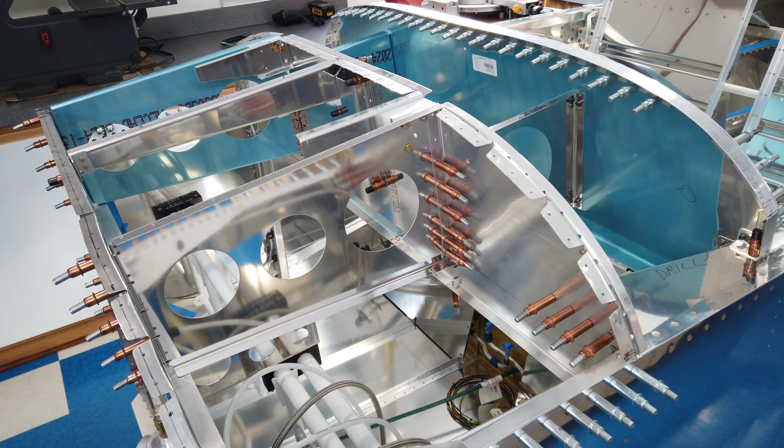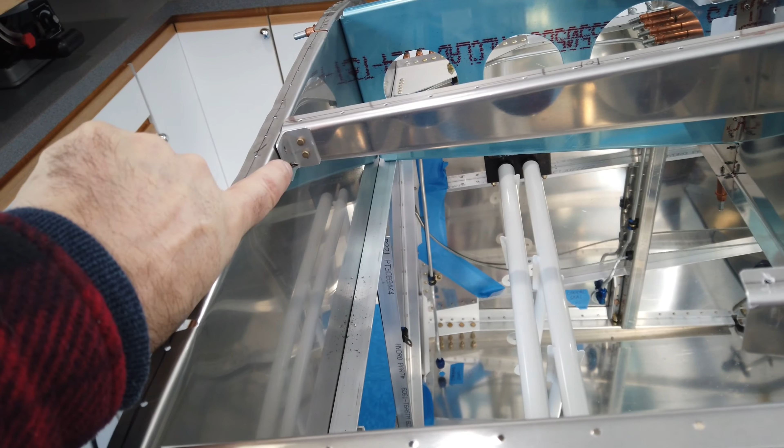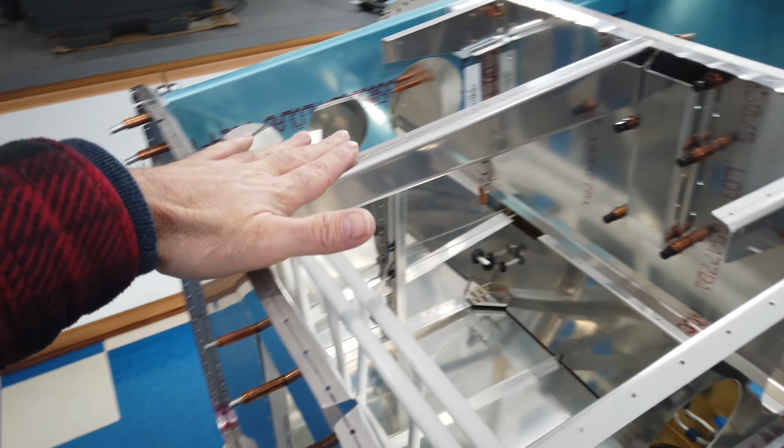So like I had said before, I had the skin on here and I match drilled everything that I needed to match drill with the skin on. Since then, I've come back and I've made this angle bracket here, and I've gone ahead and match drilled it to the firewall, and I've got it held down with a single cleco. So now this piece is done and secure. I still need to figure out where to put the holes on this piece for the nut plates.

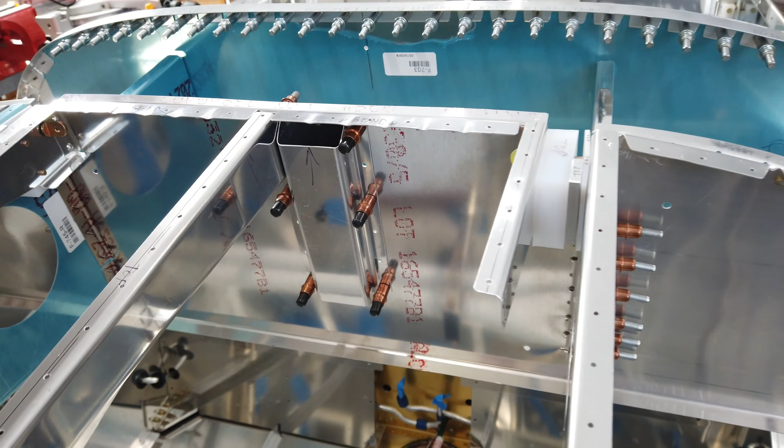These nut plates attach to this piece to hold the block that holds the pivot mechanism for the Canopy Jettison linkage. So the first thing that I've decided to do is to find the linkage and start making it. This is drawing 47. You can see the linkage here, and I'm making these two pieces here, these two metal tubes.

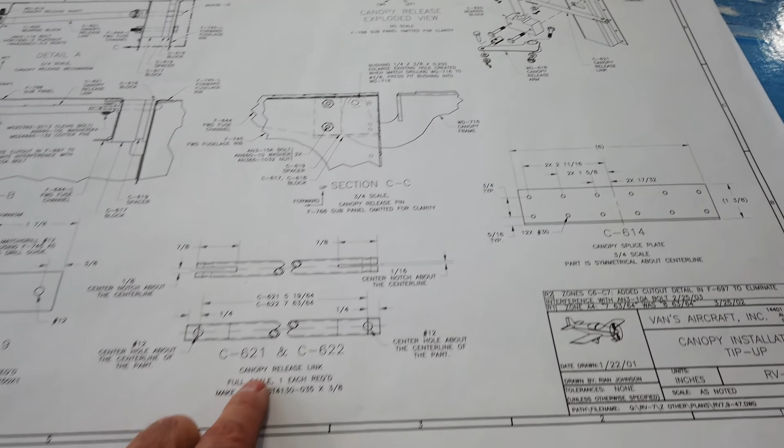They're 4130 steel. Here are the two detail drawings for those two tubes. You'll note that they're different lengths — this one's quite a bit longer than this one. These are the details for those, and I've already started on them.

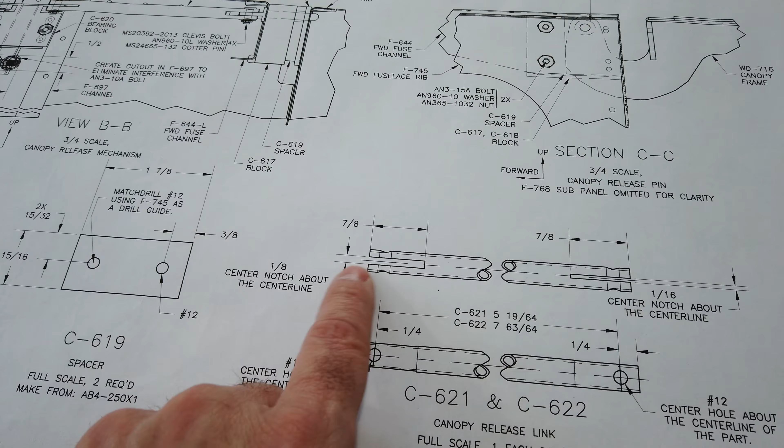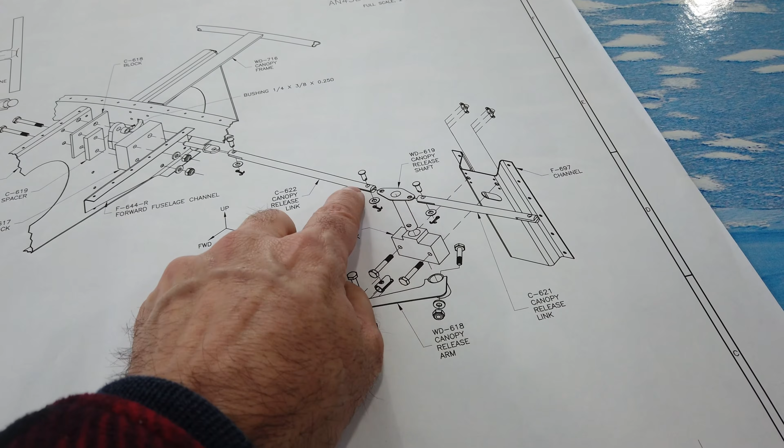Another thing to note, one end of each tube gets an 1/8 inch thick slit, and the other end of each tube gets a 1/16 of an inch slit, roughly. The smaller slit, the 1/16 inch slit on each end, is for this metal piece here, and the wider 1/8 inch slit on each tube is to fit this eye bolt.

So I've already started on that, and basically I'm starting on the 16th slit. All I had done was use— not a bandsaw, I couldn't use my bandsaw. I didn't trust it, and I don't have the right kind of blade for cutting steel, but I used just a hacksaw and cut it down, and then used a very small jeweler's file to open it up a little bit wider and clean off the rough edges.

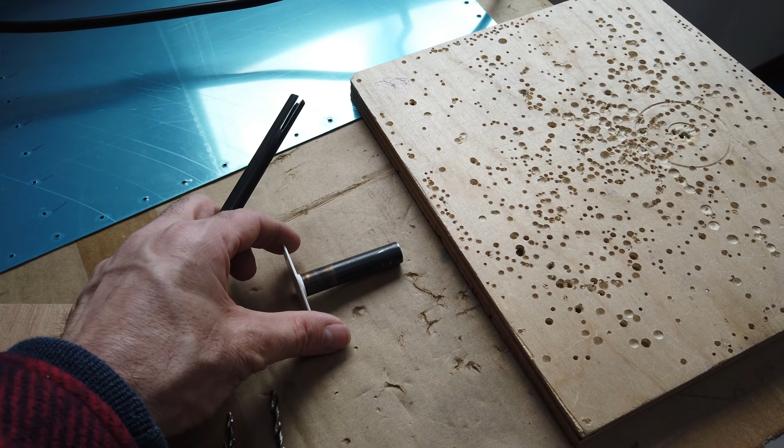Here's the metal piece, and the slit's got to be wide enough for this metal piece to fit into it.

Now that I've got that done, I'm getting ready to drill the hole through the end, and I've got my drill bits out. I've got the smallest one on the drill at the moment, but what I start with is this — this is a center drill. It's quite small, I don't know what number this is, but I just use this to start my pilot hole.

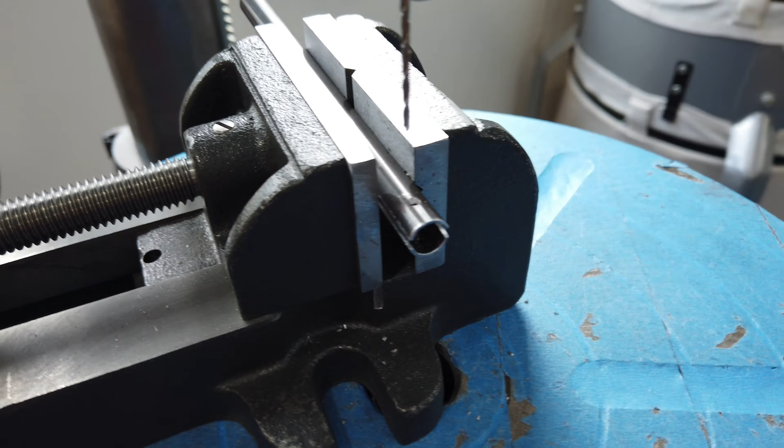I've already done that on the drill press. I've got my piece on the drill press. Of course you want the hole to be perpendicular to the slit. I've got that set up, and I've already drilled with the— wow, I just can't think today, it's not a countersink, I just said what it was, the center drill. So you can see where I started with the center drill here.

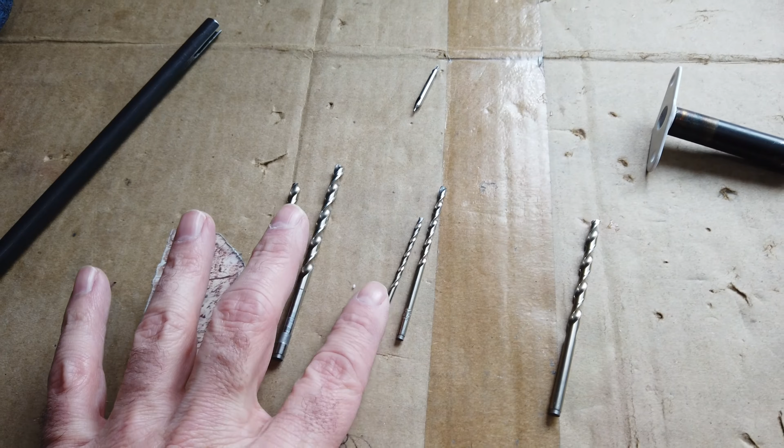I've got my smallest drill bit in now, and I'm going to go ahead and drill through the hole and through the other side, and then I'll step up gradually — larger and larger till I get to my final size, which is a number 12. So that's the plan.

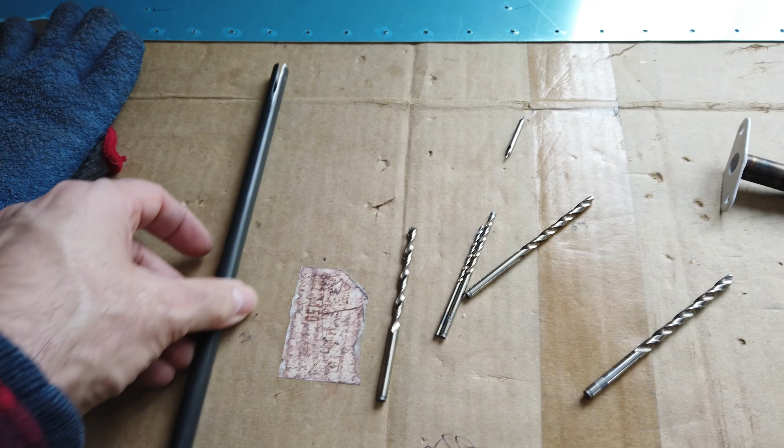To do the larger slit on the opposite end of each tube, I'm going to use my milling machine. I didn't have an end mill small enough to do the 1/16 inch slit, but I do have an 1/8 inch, so I can cut the slit on the other end. That's the plan. Let me get these holes drilled, and then we'll see what gives.

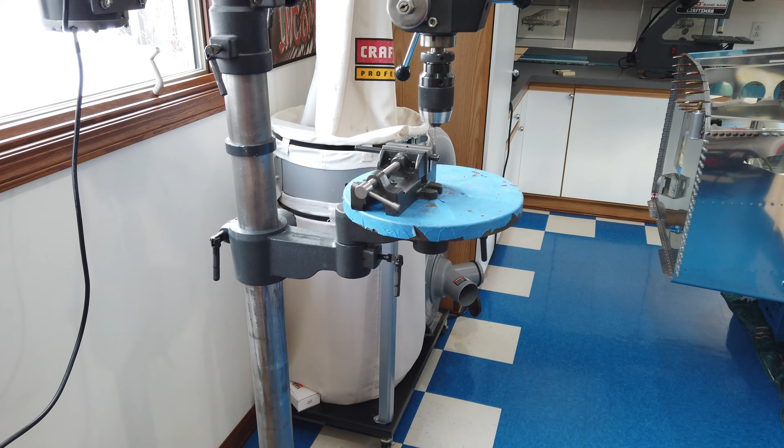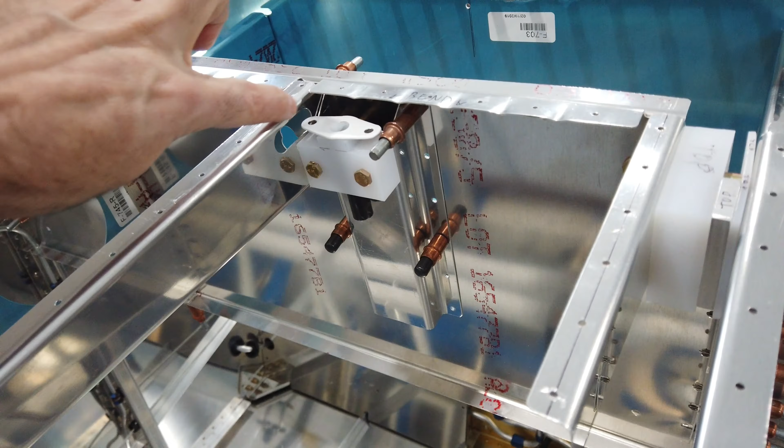Okay, so back at the airplane, what I have done — you can see where I have put the slit in this piece for the rods that connect from this pivot point out to the actual pins that get slid when this rotates. So one of the arms has to pass through this piece, and you have to mill a slot so there's enough room so when this piece turns, your shaft can still go from this point to the pin and not interfere with this piece.

So I've got my slit cut. You can see I've got my block in place temporarily — this is just slid on with a couple of bolts.

So what I'm doing now is a couple of things. One, I'm verifying the length from this point to this point for one rod, and then the length from this point to this point for the other rod. I'll adjust the length of those rods if needed, and then I'll finish slitting them and putting the holes through them.

I am also making sure that I can put a rod on here, put a bolt through it temporarily to hold the rod, and just make sure that when this piece is parallel with this piece or parallel with the block, that the rod itself doesn't hit this slit either top to bottom or back here in the corner, just to make sure that when this is in the correct position, this orientation, that the rod that's connected to it doesn't hit inside of this slit.

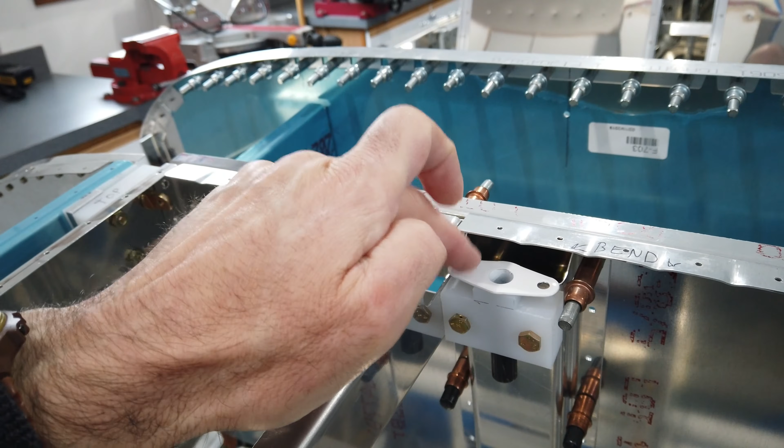So I've already done that. I've verified that the rod will fit onto here, and it will. I haven't done this, the slit for this end yet. I've only slit each rod to fit this piece, but I've had it on. I've had the rod connected. I verified that it does in fact clear the slit very nicely. Of course, the block fits nicely onto the channel piece.

I've got the channel piece drilled, but I have not installed the nut plate. So I think that's what I'm going to do next. I'm going to go ahead and pull this off, and then I'll go ahead and drill my holes required here for the nut plates. I'll pull this piece off, drill those holes, put the nut plates on. Then I can bolt this piece in place, and then I can go ahead and figure out what length this rod needs to be, cut it to the appropriate length, slit it for this pin, and then drill my hole.

And then I'll do the same on this side. I'll figure out what length this rod needs to be. I'll slit it for the pin and then drill my hole. So I think that's the procedure that I'm going to go with going forward.

Just another reminder, when you drill holes through the soft plastic, you got to use a different size drill bit than you would if you were drilling through metal. So when you drill these holes here through the nylon, that would be a number 10 drill bit. But when you drill through the metal, that's going to be a number 12.

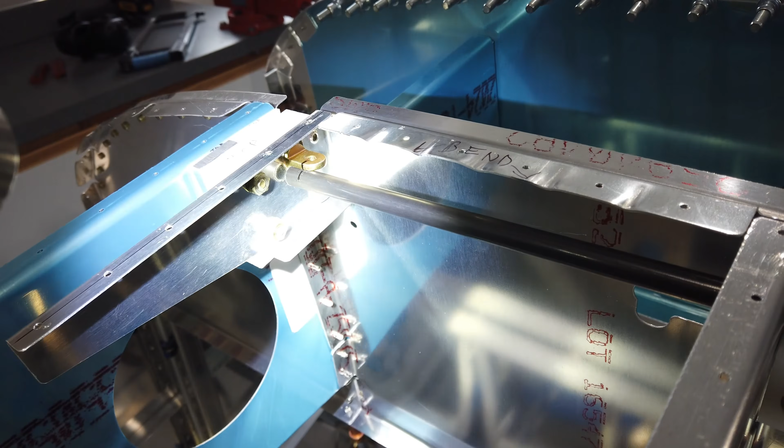And what I'm trying to do now is figure out the length to cut the tube. So I've been chipping away at it, and I've got it cut to the appropriate length. And now I'm marking the spot to put the hole through it.

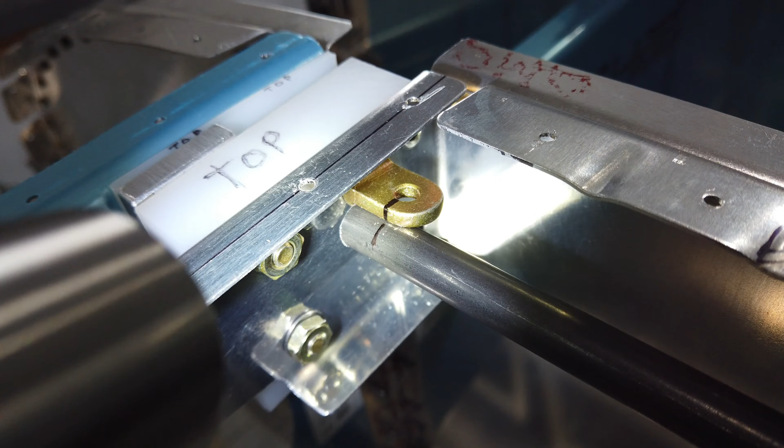So you can see the pin has already got a hole in it. And what I have done was, just using a Sharpie marker, I went ahead and marked roughly where the center of the hole is. And then I brought that line down around to the edge of the pin. And I've got my tube laid slightly under the pin, and I just transfer that line from the pin onto my tube.

Couple things to keep in mind. One, you want to make sure that the pin is pushed in all the way, that it's fully engaged. And you want to try and have the edge, the length of the tube, the edge of the tube almost touching the shoulder of the pin, if that makes sense. So you want the end of the tube almost touching that shoulder area of the pin. That will give you good edge distance on the tube itself.

And then it's just a matter of transferring the center line of the hole to the tube, which I've just done simply by using the Sharpie marker. So that's what I'm going to do next. I'm going to drill that hole, and then I'm going to cut the slit. And this slit's going to be 1/8 of an inch or slightly wider to fit the thickness of the pin.

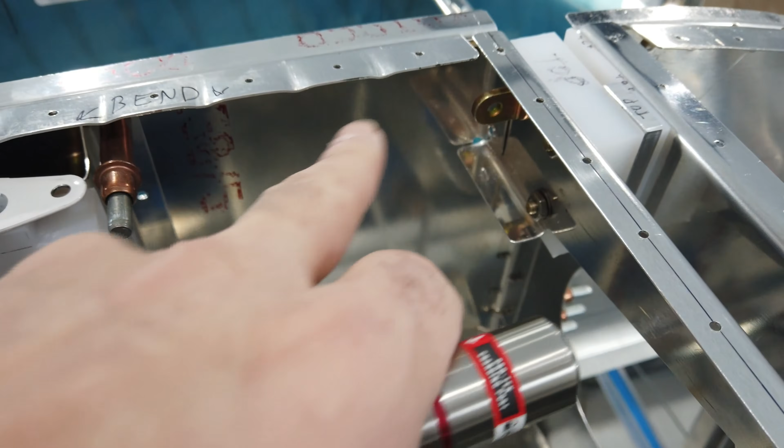And then I'm just going to duplicate that exact same thing for this side. I don't believe I need to cut this length. I think the tube is already a good length. I think it's just a matter of marking the hole and then putting the slit in it. But I'm just going to do the same procedure for this other side. So let me work on that, and I'll show you the end result when I get it done.